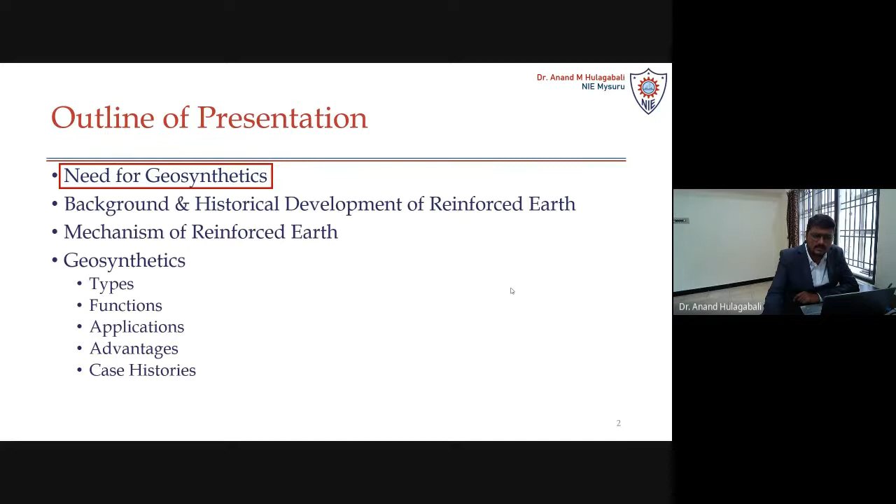So we are going to talk about applications of geosynthetics in civil engineering projects. Since this has been my primary area of interest, we have done a lot of work in this area, and a few things I'll be discussing in this particular webinar. Before I go with the actual applications of geosynthetics, first we need to understand why geosynthetics are needed, why it is so important, and the concept behind geosynthetics, which is basically a reinforced earth concept. So we'll look into some historical development and the background of reinforced earth, and some mechanism of reinforced earth. Coming to the geosynthetics, types, functions, applications, advantages, and case histories. At the end of this lecture, I'll be discussing a few case histories where geosynthetics has been deployed successfully in various sectors of civil engineering.

First thing is why we need geosynthetics. So there are different problems we are facing in today's life. All of you know that due to the heavy rainfall in recent days, in fact every year, it has become a huge problem. So landslides have become a big challenge for us. We can call them slope failures or landslides. These are due to the heavy rainfall, or small shocks from earthquakes, or some increase in pore water pressure by the rainfall. But when we are dealing with this type of slope failures, we need to understand the basic background of these slope failures, and we need to deploy some method where these landslides can be mitigated successfully.

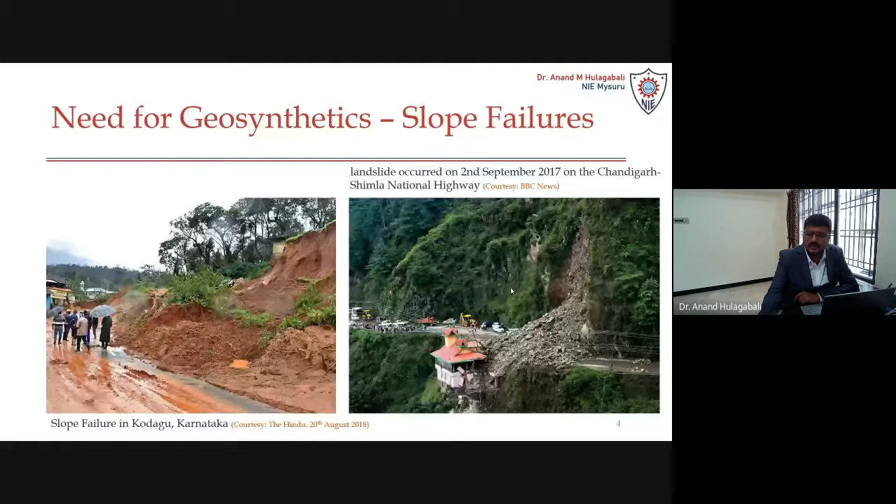So these are some landslides which occurred very recently. A couple of days back near Belgaum, Karnataka, in Dudhsagar, there was a landslide. Because of that, they stopped the railway functioning for a few days. In fact, last year we have seen many landslides near the Western Ghats, even in some parts of Coorg district in Karnataka last year and a couple of years back. So from the last 2 to 3 years, there has been a lot of rainfall, and due to that, we are experiencing a lot of problems with respect to landslides. In fact, just 3 days back, there was a landslide on the Bangalore-Mangalore highway, and some section of the highway was closed due to the landslide.

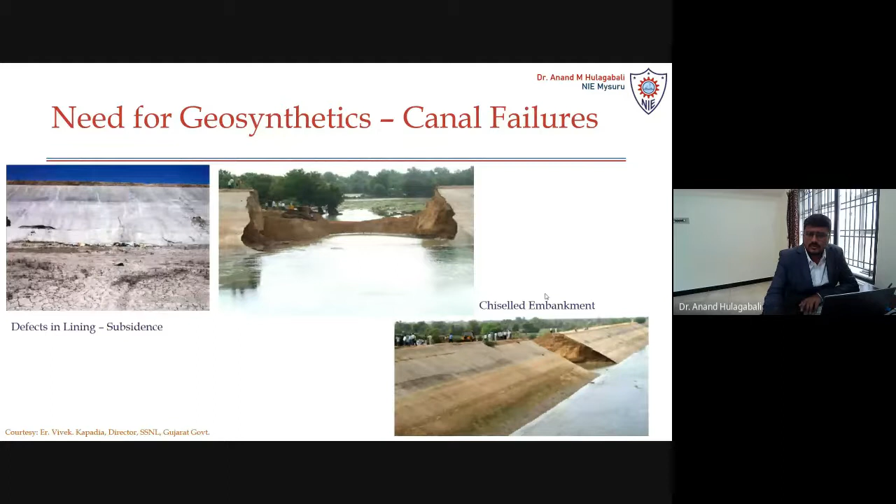And maybe due to the internal stresses which occur, that may cause the complete collapse of canal liners along with the whole section of the canals. Then, in fact, we have also seen some earthen dam failures in recent years. One earthen dam failure, which was very significant, was in the Konkan region of Maharashtra, where almost 19 deaths occurred, and also 4 people were missing, as per the newspaper records.

It was a very old earthen dam, and due to the heavy rainfall... as we all know, in the Western Ghats rainfall is a big factor, especially in monsoon seasons. So due to the heavy rainfall, there was a collapse of the earthen dam. Even in the US, there was one failure of an earthen dam, which was mentioned in the article of Sharma RP et al. in 2013.

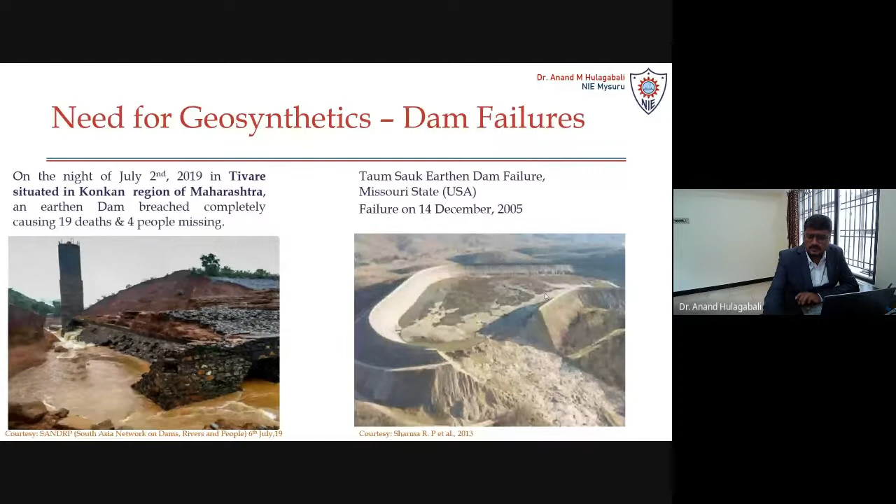These are probably due to the subgrade soil, which is expansive in nature, and maybe due to the infiltration of water from the surroundings of the pavement, which can cause such failures. So we need to deal with subgrade soil very effectively to avoid these types of failures. Coming to geo-environmental engineering, landfills are a big problem for us, with the open dumps that most cities follow.

When we have open dumps, there is a problem of rodents, and also a problem of leachate coming from the landfill, and that leachate contaminates the groundwater, and if we pump the groundwater, it becomes a huge problem for different diseases. So we need to deal with the disposal of municipal solid waste very effectively.

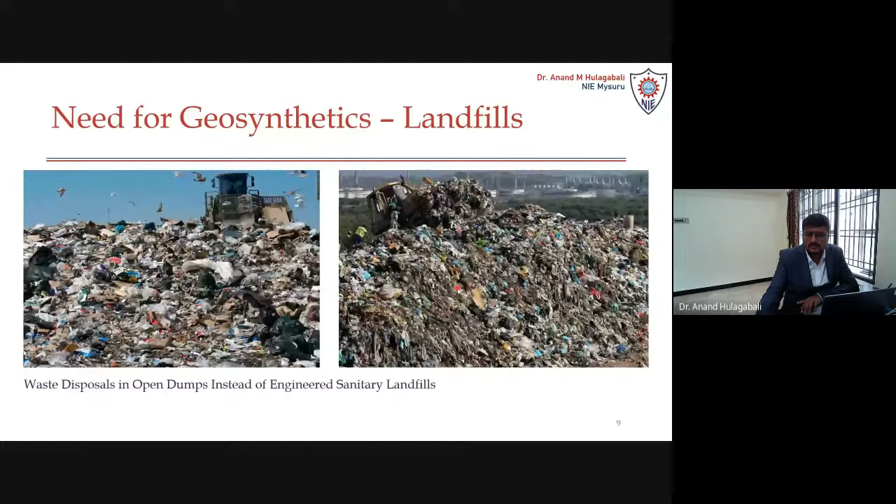Even in Mysuru, we have the problem of open dumps, even though it's one of the cleanest cities in India with a population under 10 lakhs. But we are not following engineered landfills, we are just following open dumps, and it has to be solved as soon as possible.

Coming to the failures of retaining walls, again, we have seen a lot of failures of conventional retaining walls, where the failure may be due to overturning or lateral sliding. But when we see the different failures, we understand that innovative ideas are required, and something has to be done so that we can have better stability in these kinds of structures.

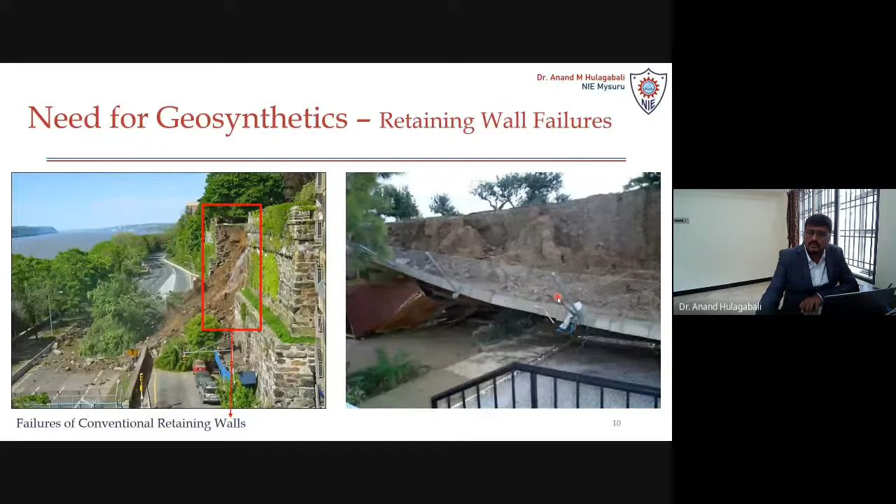So there we are going to incorporate different geosynthetic products, by which we can increase the stability of these retaining walls. Coming to shore failures, we have seen a lot of cases due to the continuous erosion of soil, or erosion of sandy soil near the seashore.

In fact, during my masters, we were fortunate to visit one of the places here near Surat, Tithal, where the gabion walls have been

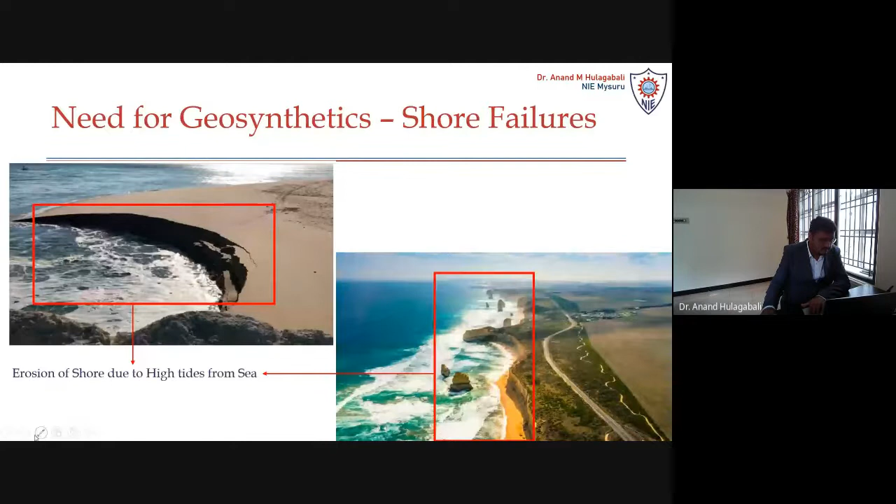Okay, then coming to the background and historical development of reinforced earth, because when we look at all these failures, we need some sustainable solution that we can easily use and implement very effectively. That's very important. So geosynthetics are based on this particular concept. We need to understand what reinforced earth is, because that concept is used for the geosynthetic products.

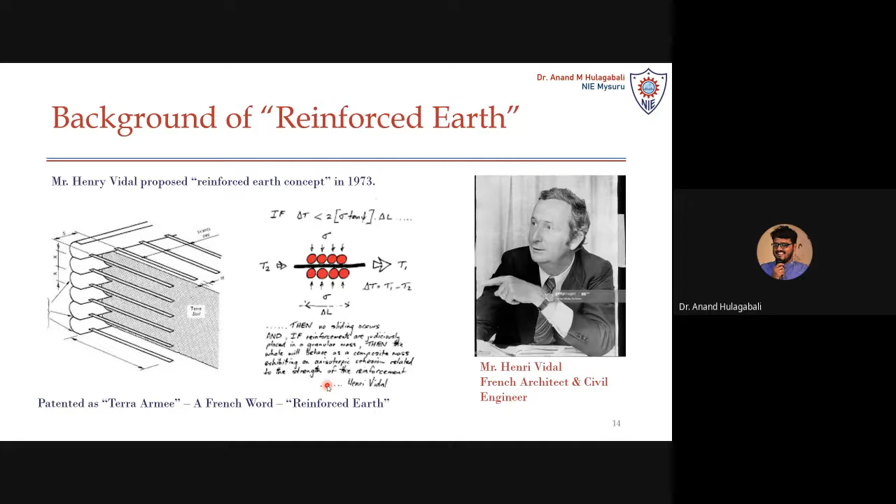It's not a new technique. Many people, especially our ancestors in rural areas, have used this technique very effectively, but it was technically patented by Mr. Henry Vidal, a French architect and civil engineer, who proposed the reinforced earth concept in 1973. The concept is very simple: when we use reinforcements in the soil, we can reduce the deformations. That is all about this concept.

You can look at this. We have a reinforced soil, and even if you apply the weight of a very huge car, we can see very little deformation. And there's a beautiful story behind this. You can look at the animation I have tried to show here.

He was very surprised, because when they were jumping on the pyramid with these tree branches, he could see that the sand was not deforming too much. So he compared before the tree branches and after the tree branches, and he was surprised because the deformations varied so much.

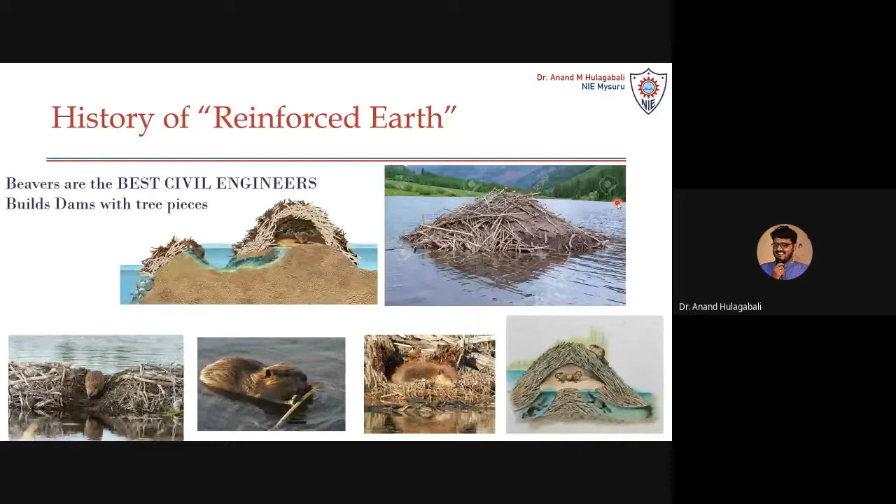And some history. When you go back 3,000 years, the Ziggurats of ancient Mesopotamia were almost 80 meters tall. The Ziggurat was built with clay bricks reinforced with reed grass. Reed is the name of a plant. Clay reinforced with reed was used for the construction of clay bricks, and these were used in different layers with spacing of 0.5 meter to 2 meters.

Of course, now there has been a lot of settlement of this Ziggurat. Now it is somewhere near 38 to 40 meters, where initially it was around 80 meters tall. But what we need to appreciate is that almost 3,000 years back, they actually thought of using the reinforced earth technique.

In fact, even in the Great Wall of China we have the concept of reinforced earth, especially on the western side. They built it on the eastern side and the western side. On the eastern side, they used bricks and chiseled stones, whereas on the western side, clay and rammed earth with some tree branches were used. This combination of reinforced soil was successfully used in the construction of the Great Wall of China on the western side.

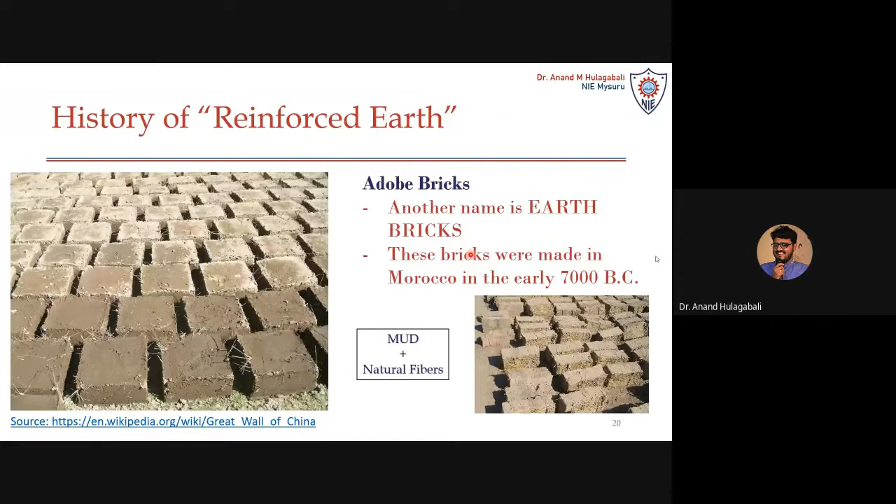Okay, and now let us look at the mechanism of reinforced earth. What exactly is going to happen in the reinforced earth concept? We have seen some history; this has been used very effectively for so many years. But when you look at the mechanism, what exactly happens between the reinforcement and the soil, how we are getting better stability, and how the deformations are being reduced, that we need to see.

In fact, you can simulate this using an experimental setup, especially the triaxial test setup, or maybe the UCS setup, where we can compare both the reinforced and unreinforced case.

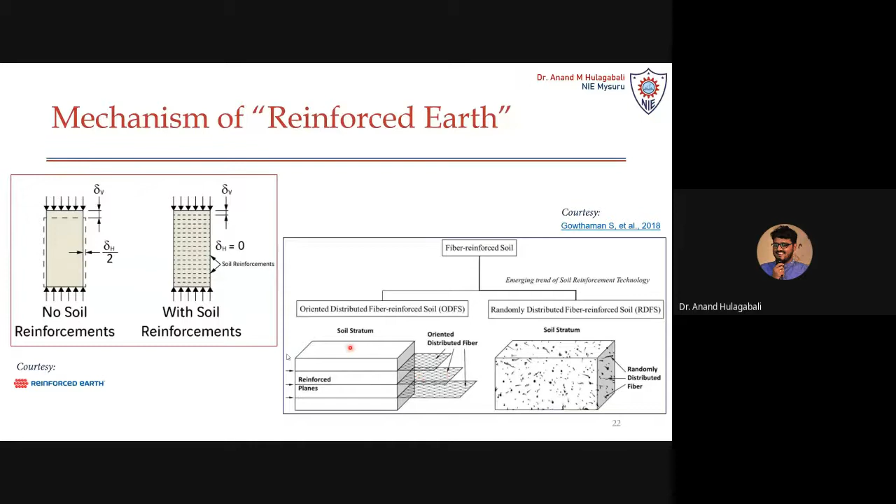So we have planar reinforcements like geogrids, geotextiles, even geocells, which are basically planar in nature. So what is the interaction here? When we have the soil particles, from these soil particles the normal pressure is going to be applied on the reinforcement, and there is going to be a frictional force between the soil particles and the reinforcement.

And when you apply the pull-out force, there is going to be a passive force, and due to that passive force you are going to have better resistance. That is the main idea behind this reinforced earth concept. In fact, in the FHWA manual volume 1, FHWA NHI 10024, they have given this interaction in detail, so one can refer to that manual for more details.

Now coming to the most important part of our lecture, the types of geosynthetics. We have seen the need, why geosynthetics are required, the historical background, and the mechanism. First, we'll look at the types of geosynthetic products. There are two: natural and man-made. In natural, we have coir and jute textiles. In man-made, geotextile, geogrid, geonet, geocell, geomembrane, geodrain, geofoam. And special products like geosynthetic clay liner, geosynthetic erosion control mat, and prefabricated vertical drains, PVDs. We'll see them one by one in more detail.

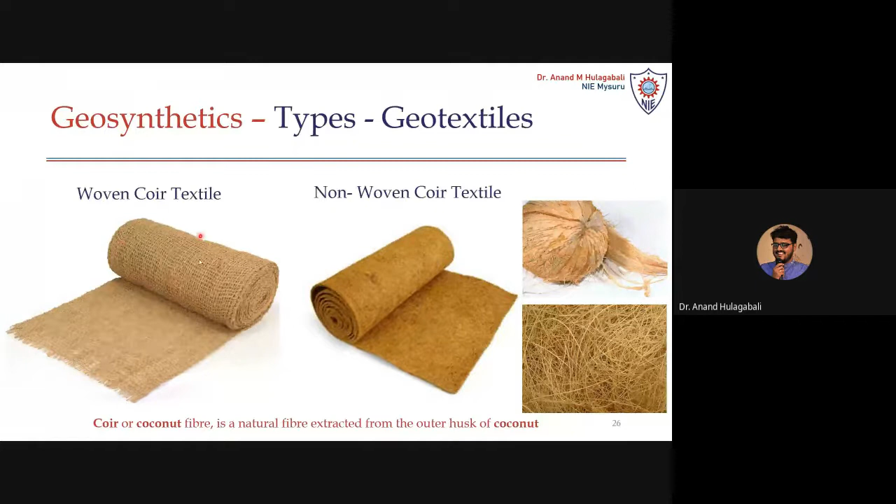These are the natural geosynthetic products, called coir, basically fibers coming from the coconut. These coconut fibers are used in manufacturing woven and non-woven coir textile. We also have woven and non-woven geotextile from jute, which is obtained from the plant Corchorus olitorius, and from this we obtain woven and non-woven textiles.

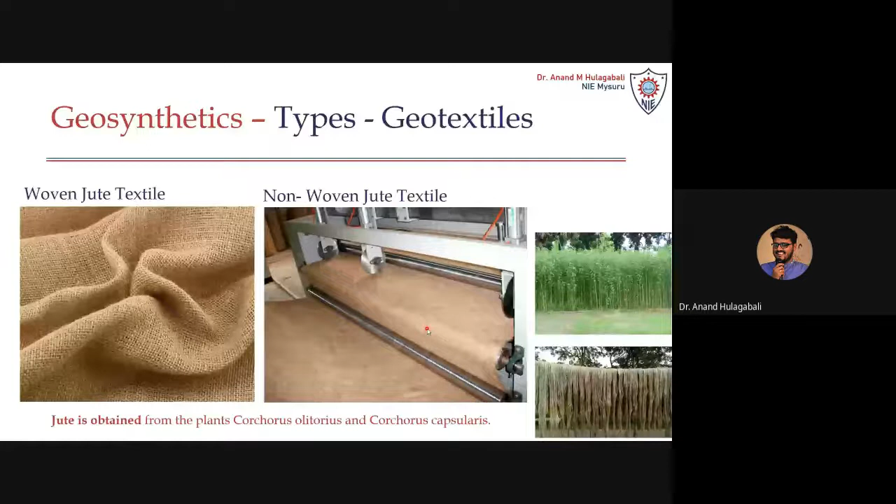Woven means we stitch them properly in a sequential manner, but non-woven jute textile is randomly stitched, or randomly punched with needles. This is what happens in man-made geotextiles, products stronger than the previous one. Coir and jute are going to decompose or degrade with the soil. But here we have woven geotextile which is being used for different functions.

And this is a non-woven geotextile. Non-woven geotextiles basically come in thin and thick varieties. The thick non-woven geotextile is used for drainage and cushion. The thin non-woven geotextile is used for separation and filtration.

And this is how they are being oriented. They are very randomly oriented, so they are not in a proper way.

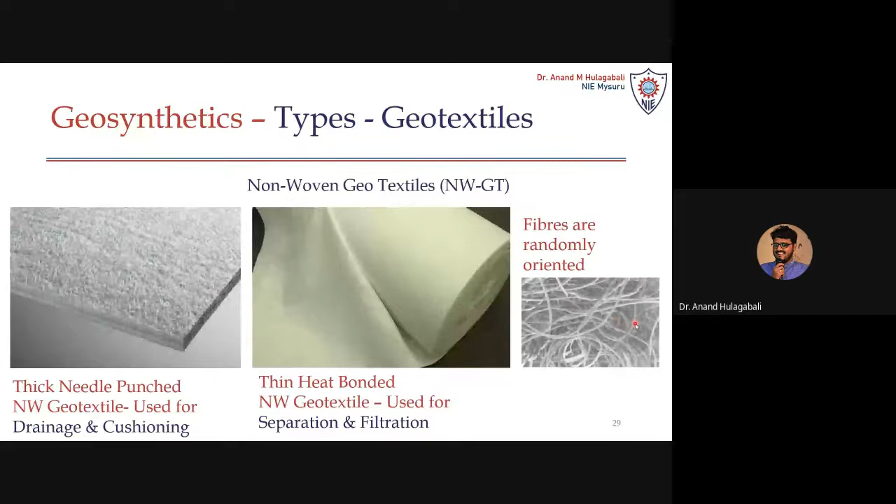Biaxial geogrids are basically used below the footing. And even recently, these triaxial geogrids have been introduced by Strata and even Maccaferri, which can be used for road upgrades.

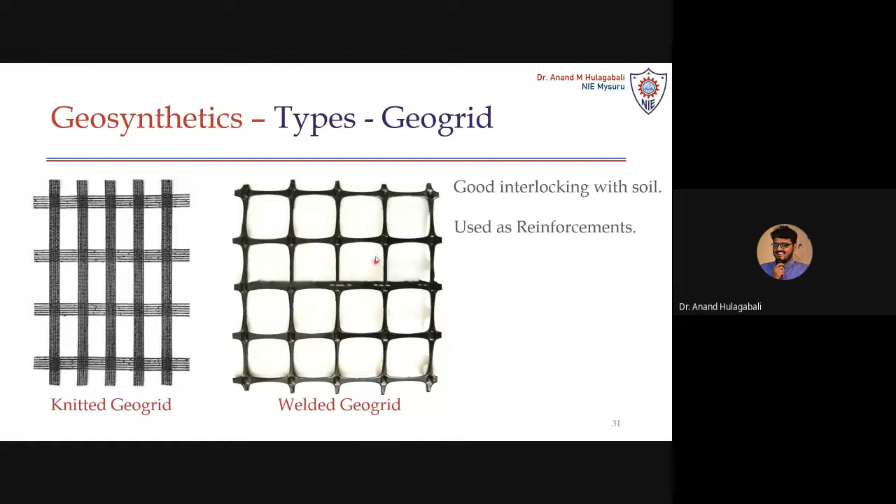Again, in geogrids we have two types: one is knitted, the other is welded. The knitted geogrid looks something like this, which is being knitted, and welded is where at the joints we weld the nodes. So we have the geonets.

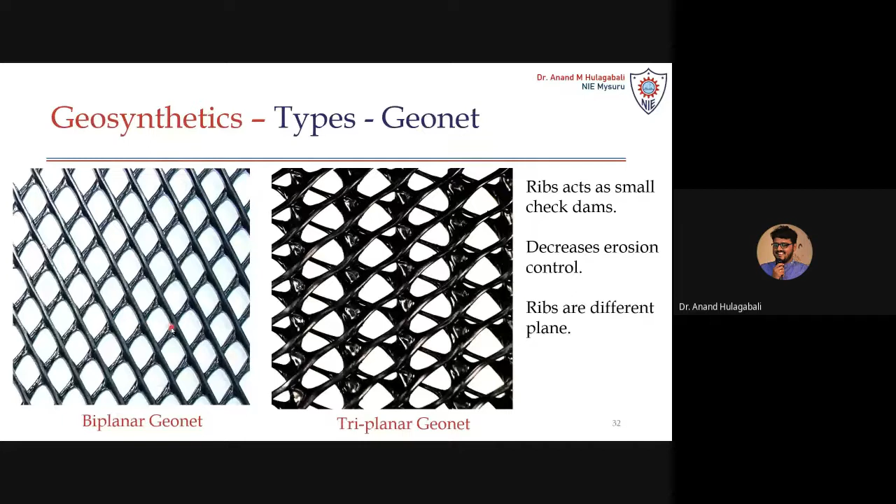So geonets basically look like this. They are used especially for drainage. Here we have two ribs which are at completely different planes, and these ribs act like check dams. That's why these are the best suitable products, especially for drainage applications.

Then we have geocells. Geocells are very easy to transport, and we can fill any material in them - we can fill with some gravel, we can also fill with stone aggregates. And these pockets, when filled, become much stiffer, which is best suitable for road upgrades. Even in container yards, also we can use them.

We can also use them for slope stability. When you use them in steps, in slope stability also they are much effective. So geocells are basically used for spreading the loads to a larger area, especially for the subgrade - they are much suitable.

And we have something called geomembrane. Geomembrane is used to contain liquid or solid - especially in case of canals, to contain the liquid, and in case of landfills, to contain the solid waste, we use these geomembranes. In fact, these geomembranes come with different thicknesses and different types of materials.

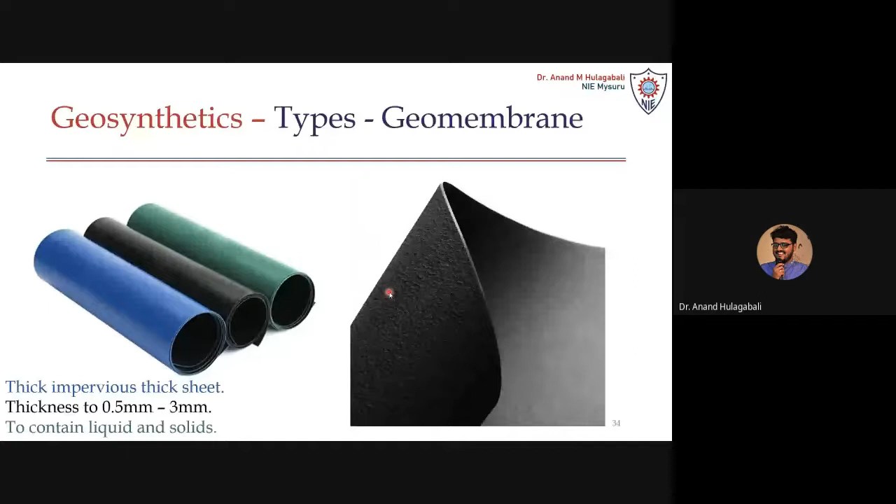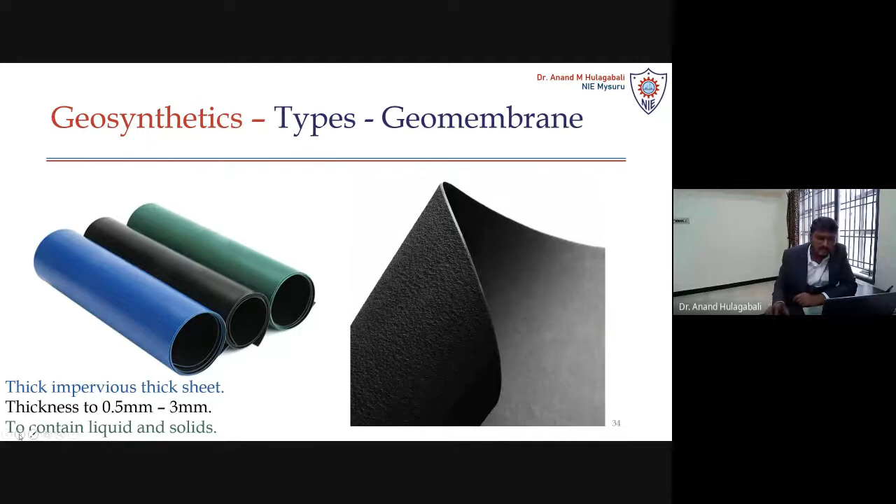For example, the geomembranes can be made of low density polyethylene, or we can have geomembranes of high density polyethylene. It again depends upon the need of the client, the need of the function, the need of the project. Based on that, we select the thickness and the type of geomembrane. But these are highly impermeable materials, and they actually contain some liquids and solids.

So these are geodrains. Geodrains are used behind retaining walls. In the earlier days, we used to have chimney drains, basically made up of stone aggregates, where we have a lot of space for the seepage of water. But in recent days, we have this geosynthetic product where we use geodrains for better drainage of water behind the retaining walls.

Again, in the case of retaining walls, instead of backfill soil, we can use geofoams. Geofoams are basically a very lightweight material, and they make the structure very flexible. In fact, you can use them as a backfill in the retaining wall.

The main idea is when we determine earth pressure from the backfill, the earth pressure is going to be much less for this, because when you take the unit weight of the geofoams, that is much lesser compared with the soil. Because of that, whatever earth pressure you get is going to be much less. So that is why the geofoam becomes much advantageous.

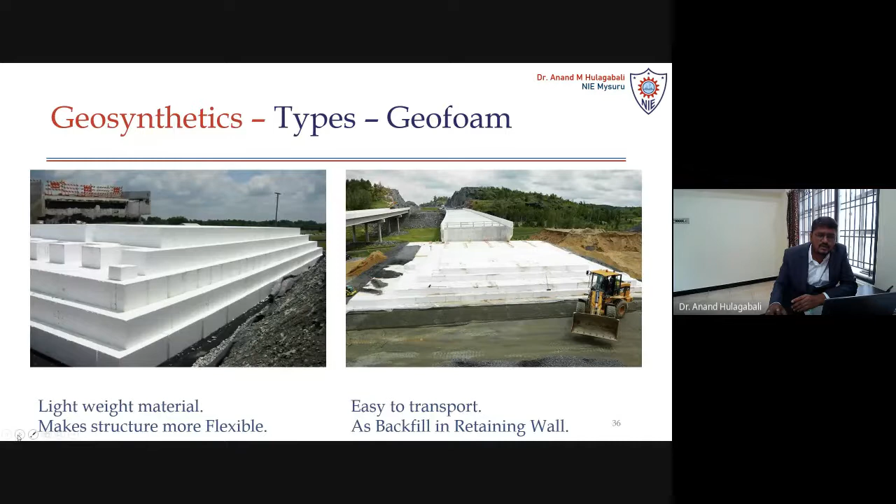Geosynthetic clay liner is used in landfills. It is an interesting formation with two non-woven geotextiles, and in between we have bentonite. This bentonite, if it comes in contact with water, tries to swell. So it's like a self-repairing mechanism, and that's one of the major advantages. This is used below the geomembrane in the landfill.

Suppose there is some leakage in the leachate. When the leachate comes in contact with this bentonite, it expands, and if there is a puncture in the geomembrane, that puncture will be repaired by the GCL. I'll come to the application part where we can see this in more detail.

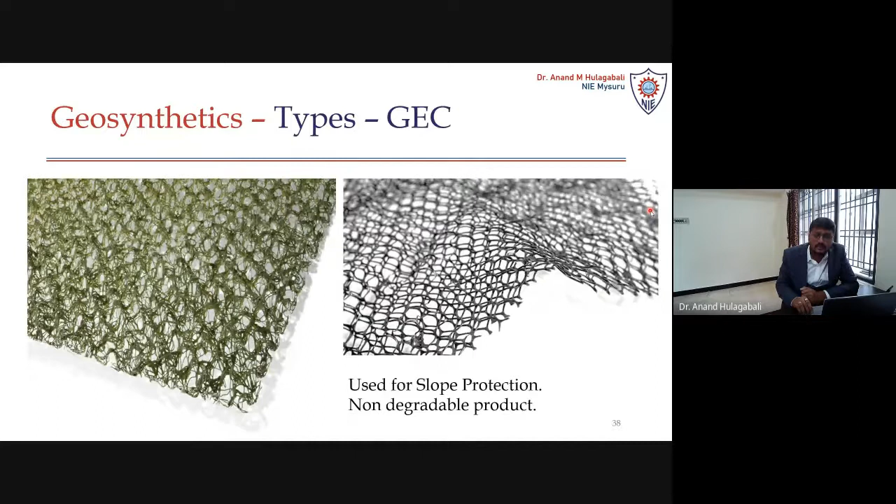Coming to GEC, these are erosion control mats, geosynthetic erosion control mats, which we use in slope protection works. In the initial slides we saw that slope failure has become a major issue, and we can have such options with mats for better seepage of water so that there won't be further failure of the slope.

Then we have something called PVDs. You all know about the preloading technique, especially the pre-consolidation technique in clay soil. To increase the consolidation of clay, we used to have sand drains along with the embankment we are going to construct, so that we increase the consolidation process of the clay.

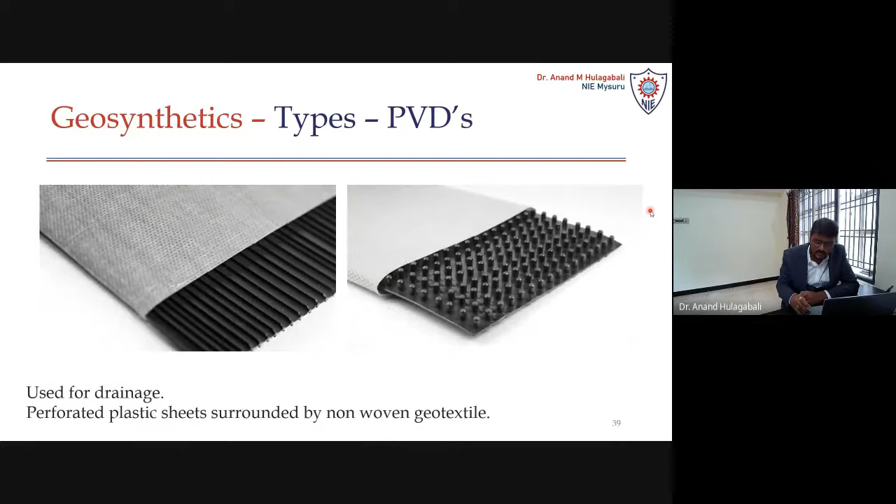But we can use these products instead of sand drains, where PVDs are replaced in place of sand drains. These PVDs have a corrugated plastic sheet at the center, and this sheet is covered by non-woven geotextile. Here you get much better drainage, almost the permeability equivalent to sand drains, so the consolidation process and consolidation settlements are much faster.

Then we have very interesting products called geocomposites. A geocomposite is all about combination. For example, if I want separation and also drainage, I use non-woven geotextile (NWGT) combined with geonet. Geonet is for drainage, and non-woven geotextile is for separation or filtration.

We get special adhesives in the market, so we can fix two products together and use them in combination, taking advantage of the functions of both products and using them very effectively. Non-woven geotextile and geonet, for example, if you want separation and drainage, this is the option you have.

Non-woven geotextile plus geogrid: geogrid is used for reinforcement, and non-woven geotextile is again for separation or filtration. Woven geotextile and geodrain: again, one is for drainage, the other is for reinforcement. Now coming to the functions.

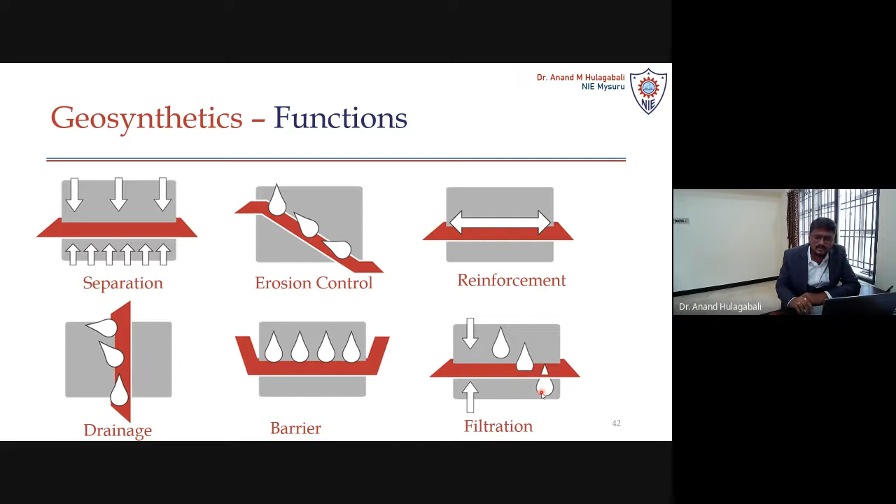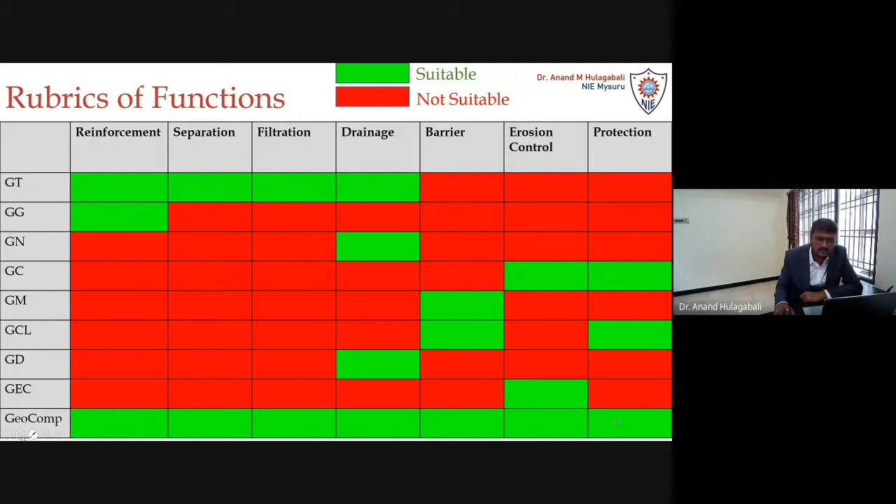Geocomposites are up to the imagination of the engineer. You can combine two products and have all the functions or any of the functions. That's why I have mapped geocomposites with all the functions. So this is how the rubric looks like with respect to the functions.

Now coming to the very important part of our lecture, applications of geosynthetics in civil engineering projects, which is the title of this lecture. Here I'm going to talk about different applications, the different areas which come under the umbrella of civil engineering. We can see disaster management, especially landslides, water resource engineering, especially canals and earthen dams, transportation engineering in case of pavements and runways, geoenvironmental engineering in case of landfills, and shore protection in offshore engineering.

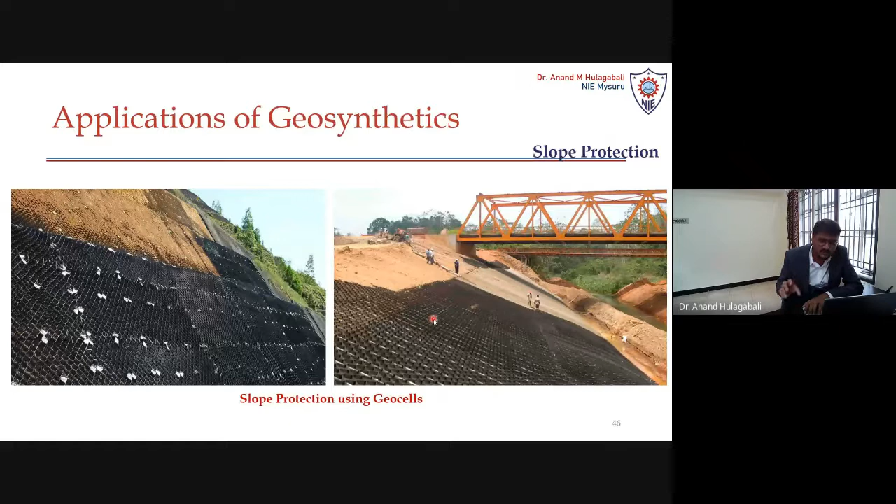In slope protection, we can use geocells, like this. You can look at this, they have used the geocells, and it can be used with some filler material so that we get much better properties.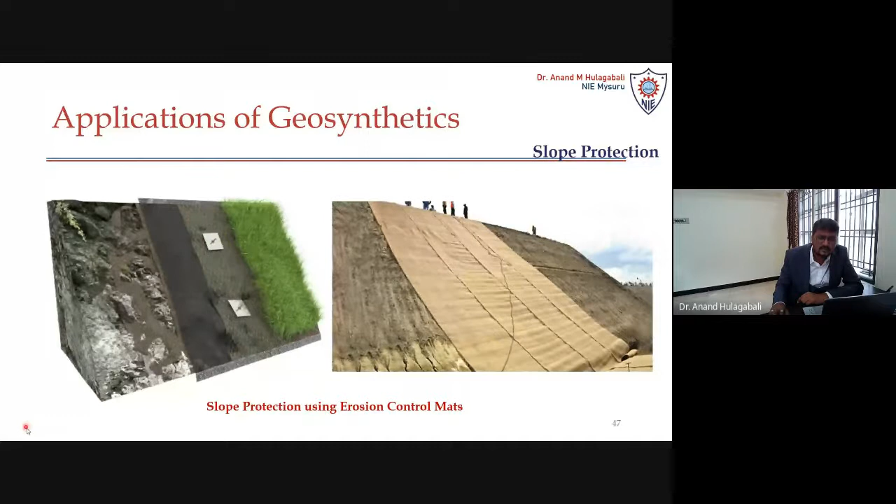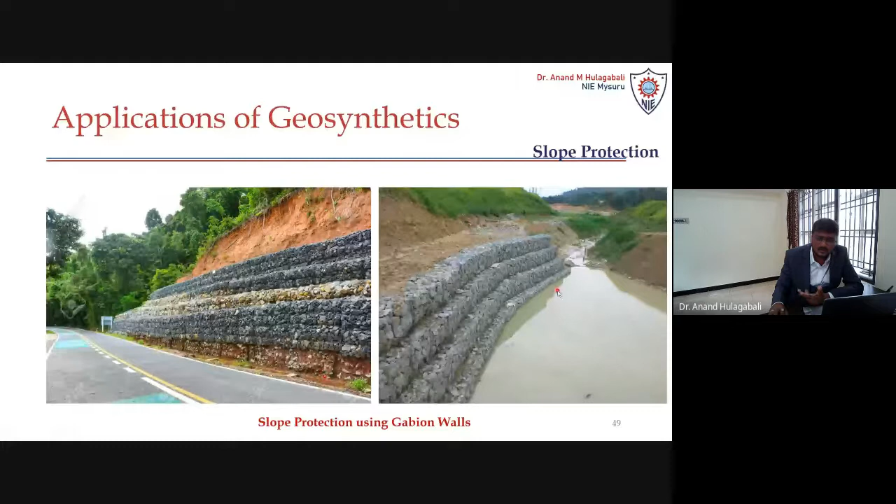Gabion walls can be used near roads or near water bodies, which is very useful. In canals, on the bottom layer and side liner, we can have geomembranes. Having the geomembrane is very advantageous because it is a barrier, so it can contain liquid. When we have geomembranes, the efficiency of canals is very high, because there is no infiltration of water into the bottom liner or side liner. That's very advantageous, and that's why we use geomembranes in canals.

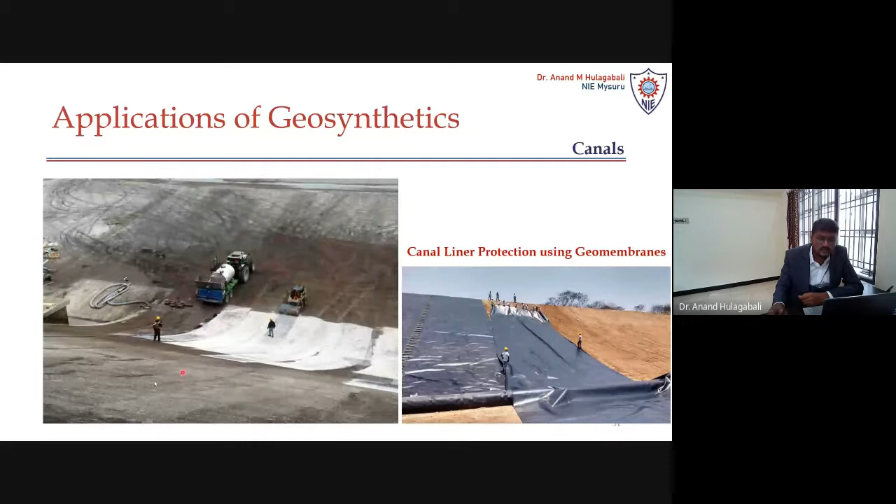We can just look at this, where they are laying the geomembrane sheets on the side liners, and even on the bottom liner they are trying to lay some of the sheets.

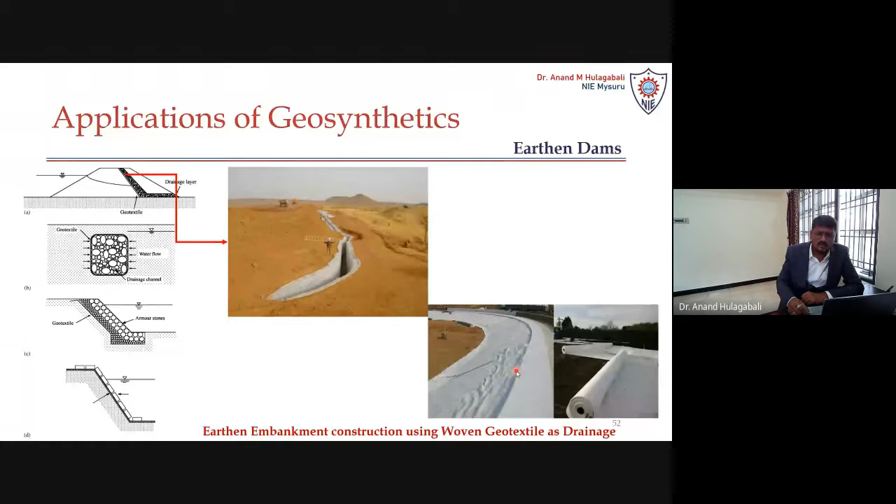In earthen dams, we also have a lot of usage of geotextiles. You can look at this, these are the sections where we use geosynthetic products - on the upstream side this may be a geomembrane, on this side this can be a geomembrane under drain, and this can be a chimney drain with some stone aggregates, and this can be a finger drain outlet.

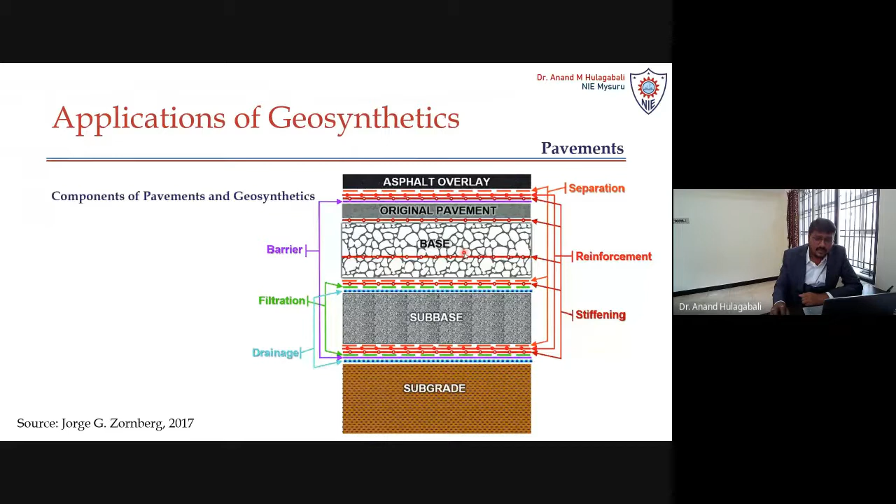But when you look at the applications of geosynthetics in all these layers, between subgrade and subbase, we have geonet, we have geotextile, we have geogrid. Again, in between subbase and base, we have so many products there. Especially when we are talking about durability and sustainability, these are the things we need to look for. We can minimize the surface settlements of the pavement, have much better performance, and also a much better life cycle of a pavement. That's very, very important.

In fact, even in the pavement, we can use geosynthetic products, especially the geotextile, in between the surface layers itself, which is called asphalt overlay fabrics. For example, let us say this is an old pavement, and here you are going to have the new pavement layer. Already you have the old pavement layer, and above that you are going to lay down the new pavement.

So in that case, what happens? Let's say there is a crack here in the older pavement. When you just lay down the new pavement, that crack is going to propagate into the upper layer, something like this. The crack from the older pavement is going to transfer into the new pavement, which should be avoided, right? So what we do here is we can have one geosynthetic product, especially the woven geotextile, which is the best product for this.

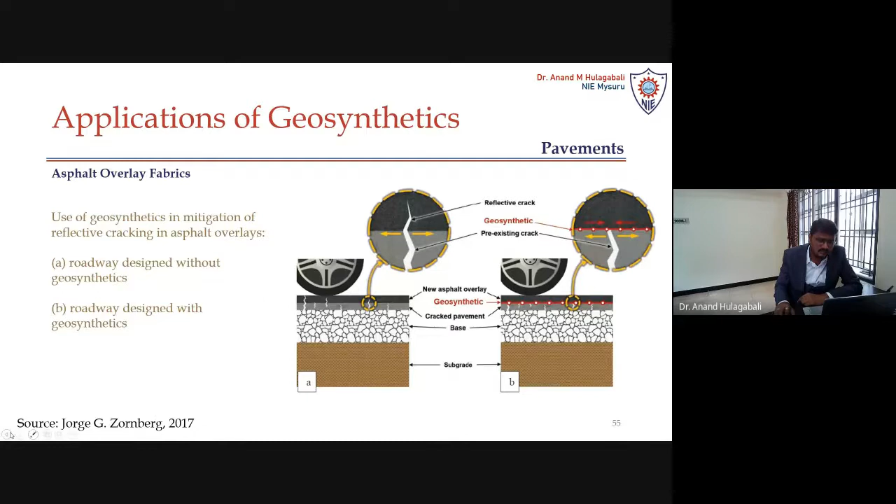The woven geotextile can be placed here, and you can compare this image and this image, where the crack propagation has been stopped. Now the crack has not propagated into the new layer. This has been taken from a very interesting paper from Zornberg 2017, so you can also refer to that paper for more details.

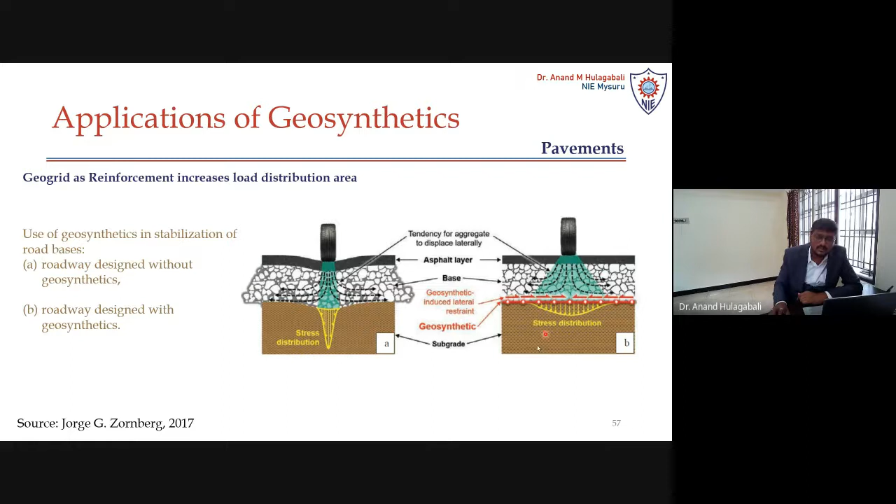Another example, where you can look at this in the case of bearing capacity analysis. As you know, this is the example of punching shear failure under concentrated loads. Once I use the geosynthetic product at the junction between the base and subgrade, what we are really doing is trying to convert that punching shear failure to general shear failure. Now you can look at this. This is a punching shear failure example. And here, this punching shear failure has been converted to general shear failure.

So general shear failure is all about well-defined shear failure surfaces, and these shear failure surfaces are reaching the ground, and here you are distributing the stress to the larger area so that you are going to minimize the settlements to a larger extent. So that's very, very important.

In fact, in the pavement again, you can use the products for drainage. Let's say there is a water logging problem below the sub base, below the base. In that case, what you can do is have one geosynthetic product like geodrains or geonets, where you can drain out that water completely, and you can have better performance of the pavement layers.

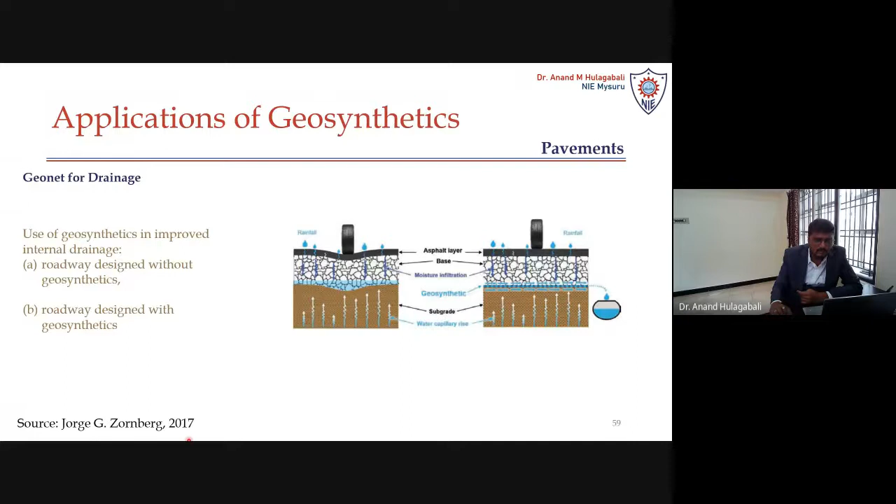So you can look at this. You can just compare this image and this image. Here we have a geosynthetic product. All the water has been drained and collected at the drains which we have at the sides. From those drains we can drain out the water. So drainage is again one very, very important thing.

So geogrids can be used for reinforcement. We can have the geogrids below the surface layer, which can be used for the betterment of the reinforcement, to increase the strength of the pavement layers, to increase the performance of the pavement layers. In fact, you can see that these are the triaxial geogrids which have been used here, which are recently produced by very good companies in India.

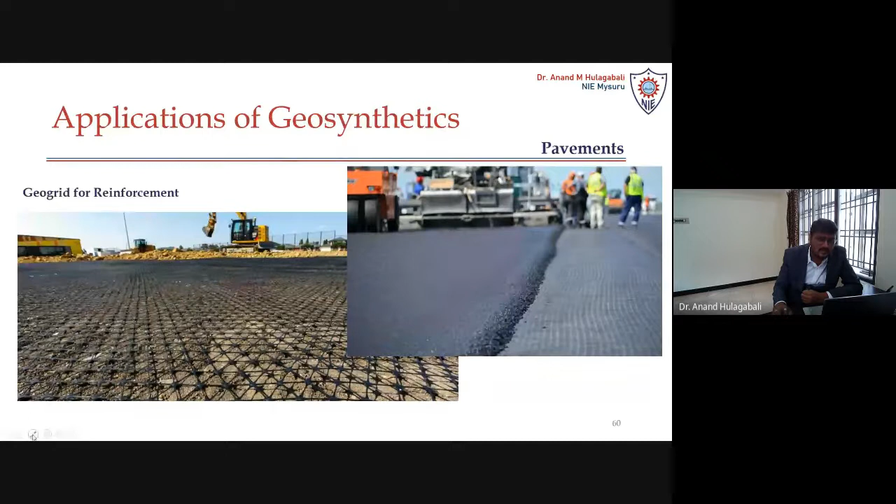And again in the pavements, as I said, geotextiles and geogrids are being used for reinforcement, separation, filtration, and drainage. Now you look at this. This is a geogrid which is used for the reinforcement purpose. This is a geotextile which is being used for the separation or filtration function.

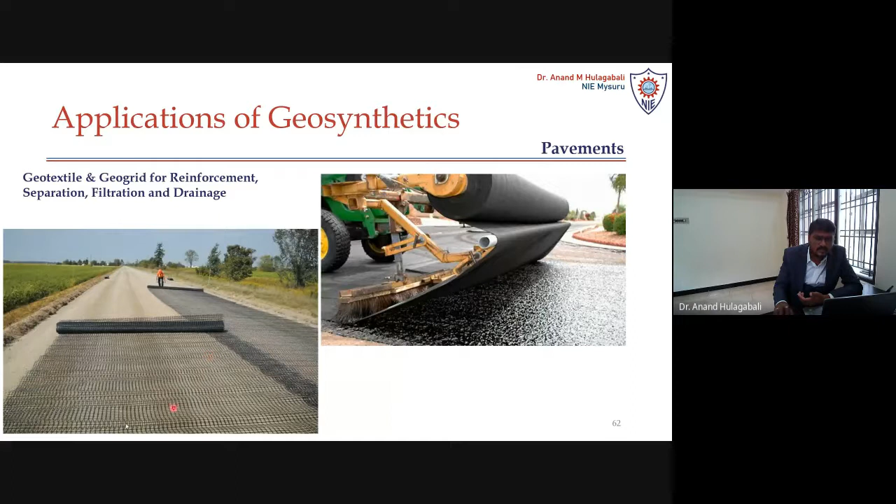Some examples you can look at. This is on the older pavement, being used as overlay fabrics, geotextile overlay fabrics, so that you cannot propagate the older crack into the new pavement. So that is the example here, and we have the geogrids here being used as reinforcement.

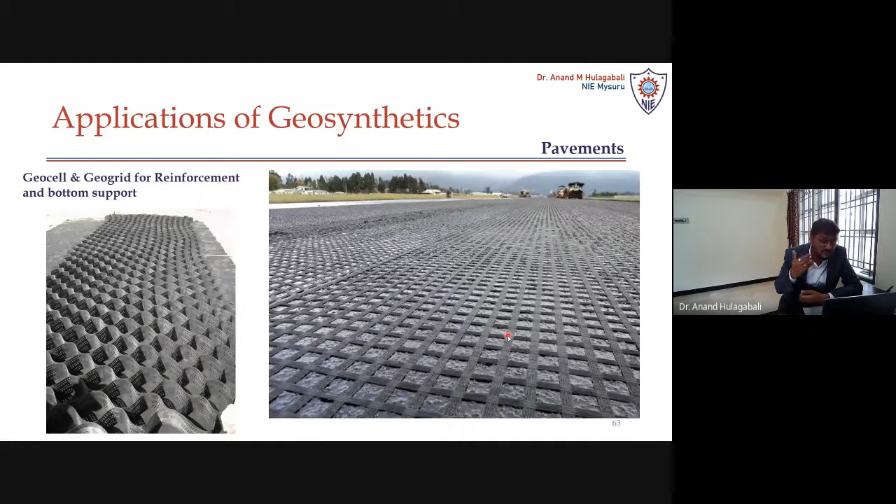In fact, in some of the examples, especially in subgrades, we have used a lot of geocells also. To have better uniformity in the subgrade, geocells are being used, and these are the knitted geogrids used for the reinforcement purpose, especially at the junction of base and subgrade.

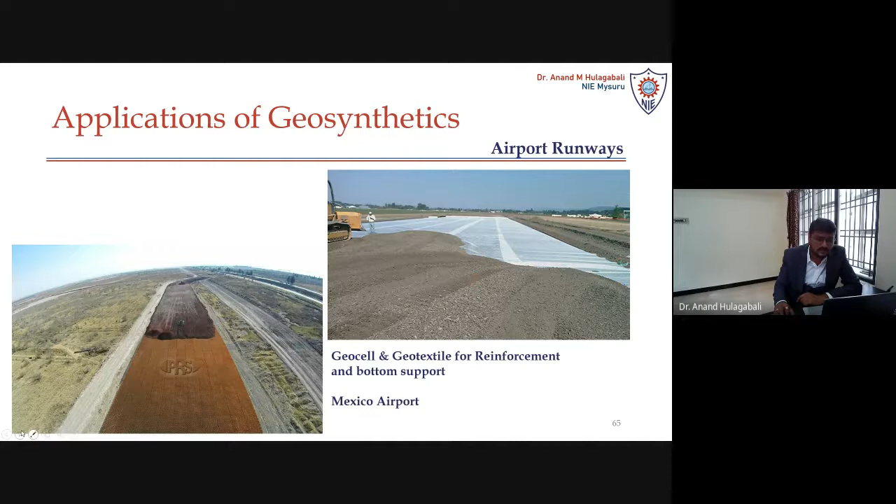So we need to dispose it properly. And this is leachate, what you are looking at here. So this leachate, if it is contaminating the water, then it's a big problem. So this is also one of the studies done by a very good friend of mine, Vemula Anand Reddy. Recently he defended his thesis.

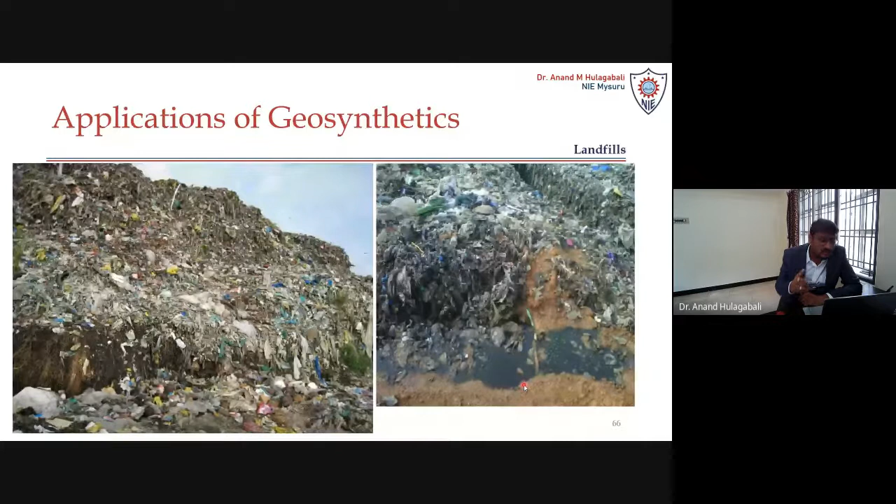You know, these contaminants, when they are mixed with the groundwater, then of course they are not meeting our drinking water standards, and in fact we need to avoid that. Okay, so we need to avoid that. To avoid that, we need to have liners for the landfills. So this is the best way of disposing the waste.

Okay, so this vegetation is much needed because of two things. One is aesthetically it is very pleasing, and also we can actually use that place for recreational purposes. For example, you can make it like public parkings, or maybe public parks, or maybe gardens or something like that. So this is a very, very important thing.

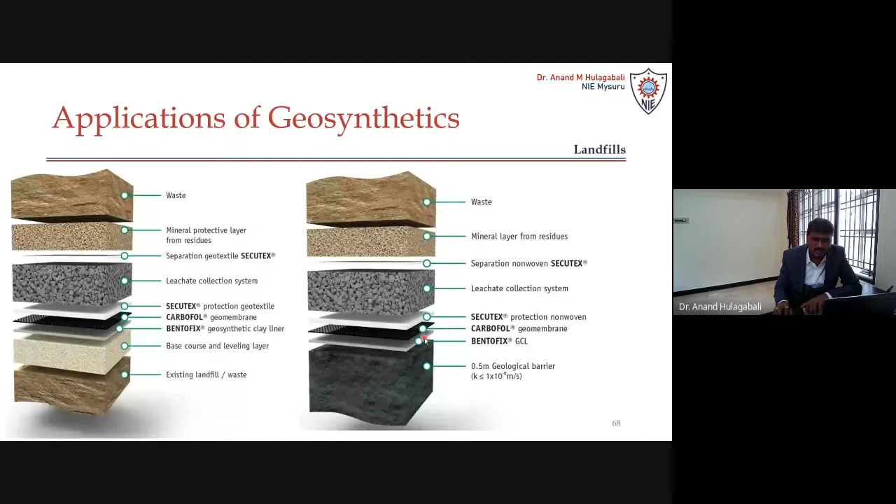Then we have non-woven geotextile. Then a protection layer from the residue. So this is basically a gravel layer. Then we have the waste at the top. Okay, so this is the best example of the liners. And this is a closure. So closure is something like this.

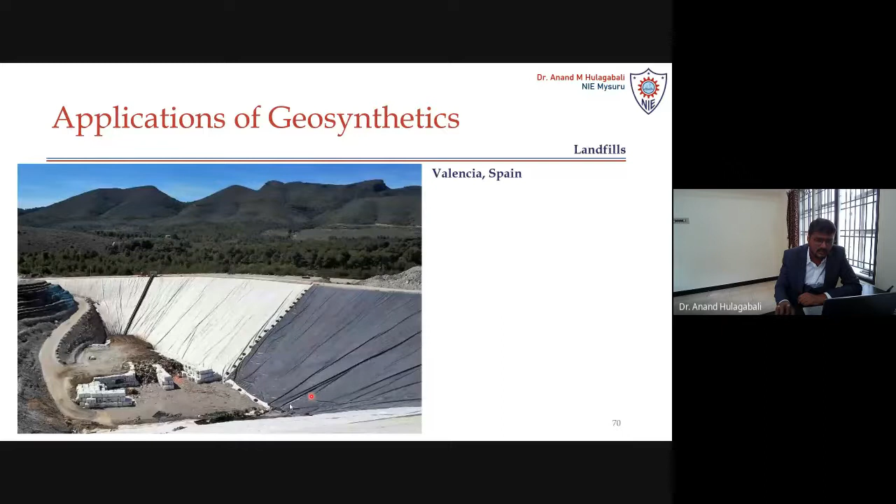A few case studies I'll try to show you here. Especially this is from Valencia, Spain. And these are the liners. Okay, so this is geotextile, this is a geomembrane. So waste is being dumped here. So these are the liners which are basically used at the bottom and at the sides. So you can see that a lot of waste can be dumped here. So on the liner and the sides, geomembrane liners are being used.

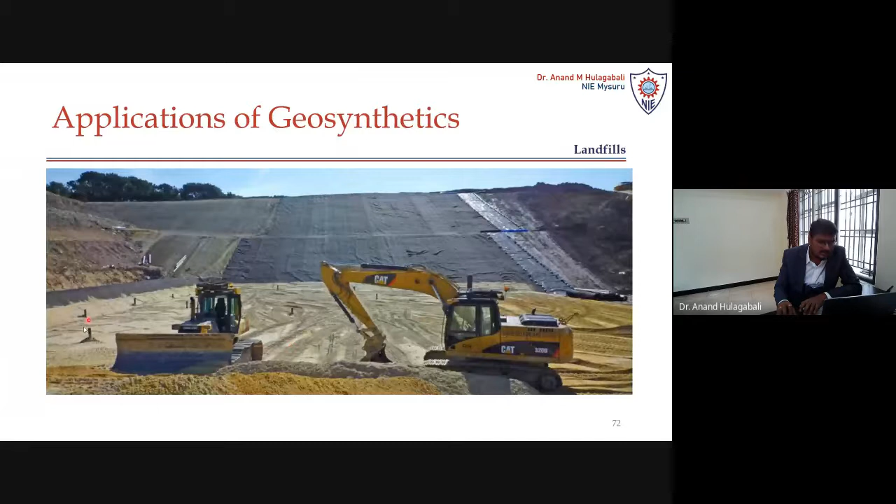First, we prepare the things. So these are the pipelines for the gas collection. So methane gas is being collected here. For a few examples, you can look at this. Okay, so this is the hazardous waste collection landfill, and these are the regular MSW waste collection landfills.

And in fact, this is one very near to Surat. We have Vapi. This is India's first vertical landfill. Okay, so they have used a reinforced earth retaining wall, which is also popularly known as MSE wall, for increasing the capacity of the landfill. Because this is a landfill we have, and this is the MSE wall. So the reinforced earth technique is used here and also here.

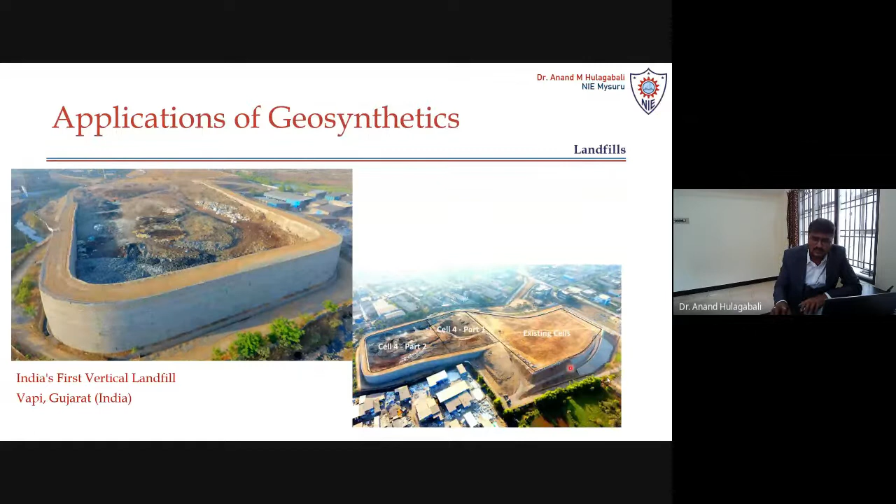So they work in different phases. So this is the existing cell, which is already being filled, and you can look at the other cells here. So the completed landfill looks something like this. Okay, so it is very pleasing and very useful for further use. Also, you can have gardens here. You can have some parks here for different purposes.

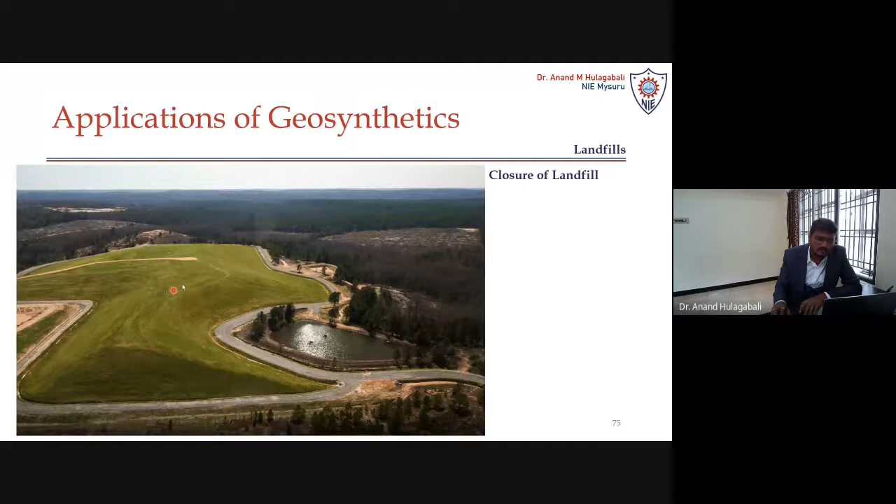Okay, so whatever you are looking at here, this is a completed landfill in all aspects. Okay, so below this, if you just do the investigation, you'll find all the waste and other things. Now coming to the very important part, that is MSE walls, or reinforced earth retaining walls. So there are different types of reinforced earth retaining walls.

I think most of us have seen these types of walls, especially in the underpasses, in the flyovers, especially from Mysuru to Bangalore. We have an expressway under construction, where you can see almost 40 to 45 reinforced earth retaining walls, which are basically used for the 10-lane expressway between Mysore and Bangalore. So this is one of the very advantageous MSE walls.

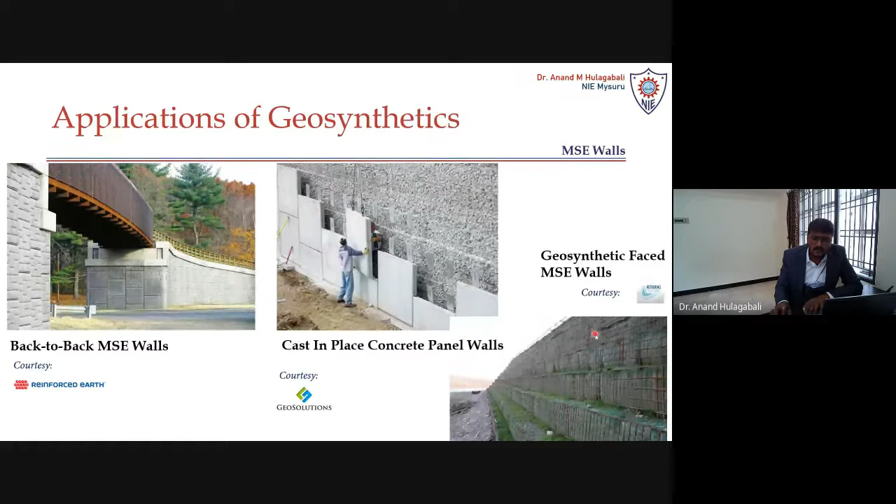In fact, in Surat itself, we have seen a lot of flyovers, and most of these flyovers are constructed with this particular technique, the reinforced earth retaining wall technique, or the MSE wall technique. Okay, fine. So these are some other types.

As I said, even our own Ahmedabad and Baroda highway, NH48, in that stretch we can see a lot of modular block retaining walls, and these are basically reinforced with geogrids at the back. At the facing, we have facing panels, and at the back, we can have geogrids or geotextiles or geosynthetic straps. So there are different things. Just now I mentioned about this.

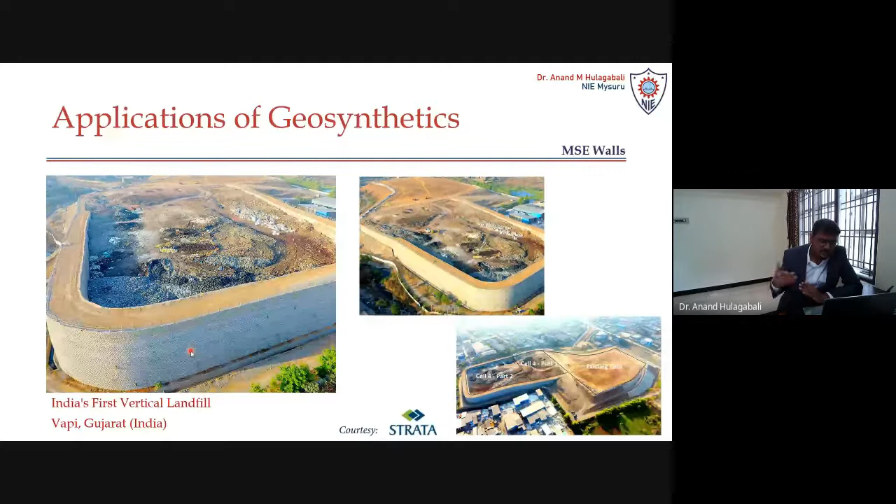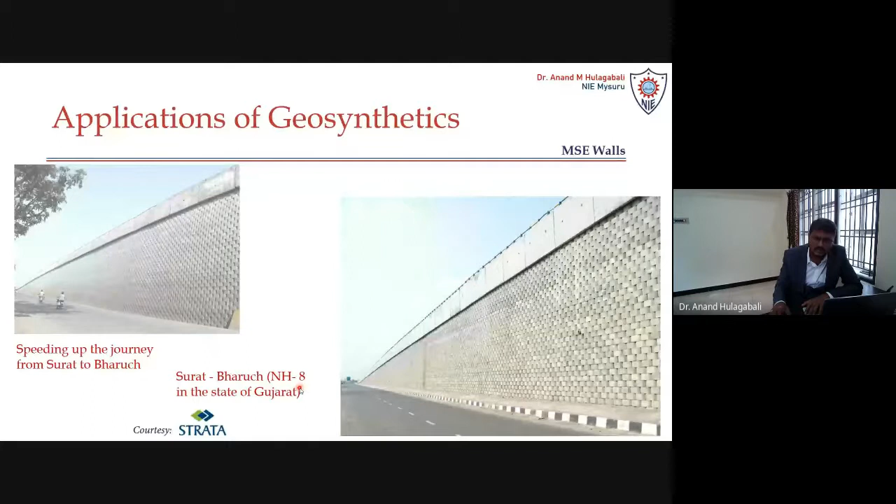So this is the MSE wall, which is basically used for the landfill. So in Vapi, both applications are there. One is the retaining wall application with geosynthetics. In fact, in the landfill, geosynthetic applications are there. In fact, on the Surat Bharuch highway also, we have modular block retaining walls, earth retaining walls, which are basically constructed by Strata.

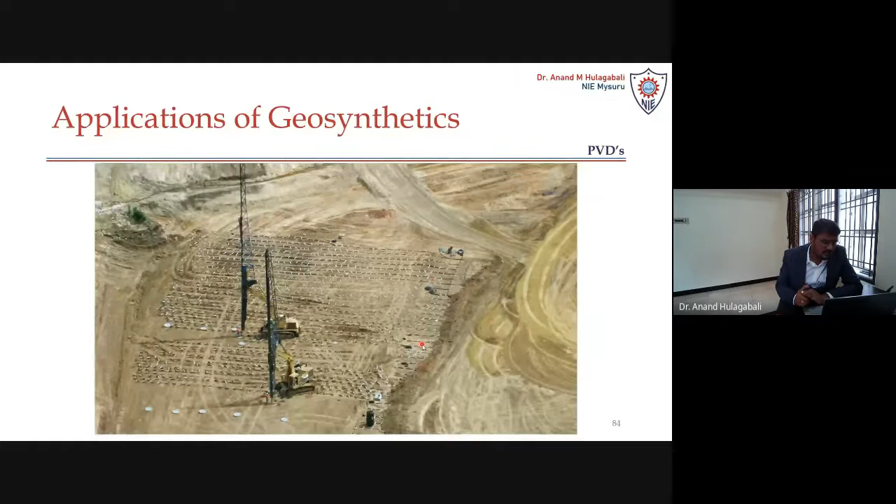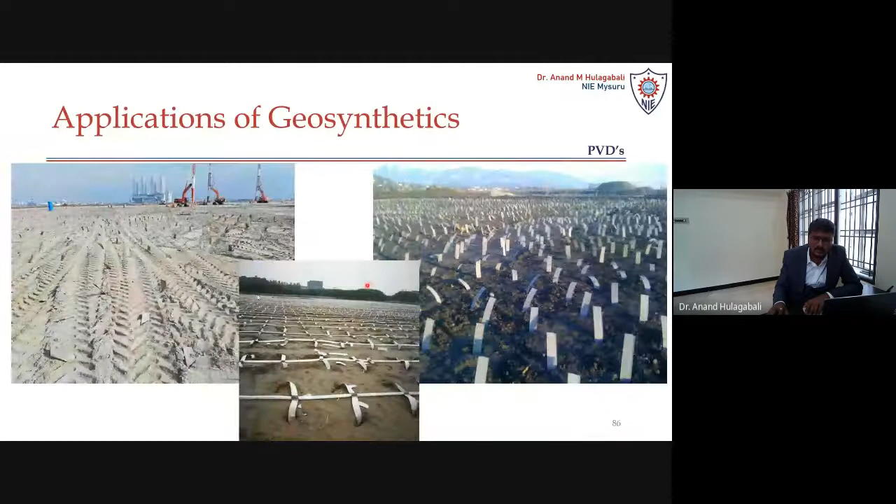And especially for shore protection. Whatever problems I mentioned in the initial slides, here we have the solutions. The problem of soil erosion on the shore can be addressed by sandbags, which are basically geotextile sandbags. And in fact, we can also use gabion walls.

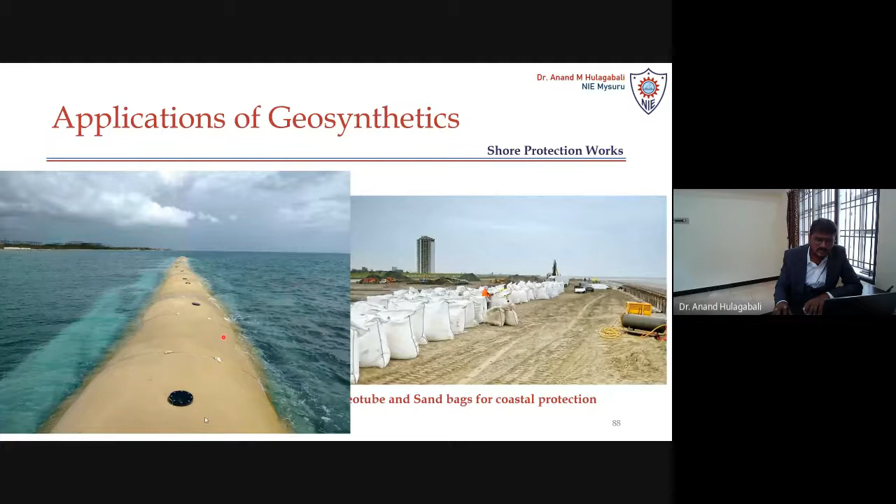So this is one example of geotubes, which are basically made up of geotextile with some pressure inside. So this is a geotube, and these are the sandbags used for coastal protection. These are the best examples you can see here. So these are a few applications we have seen. Now let us look at the advantages.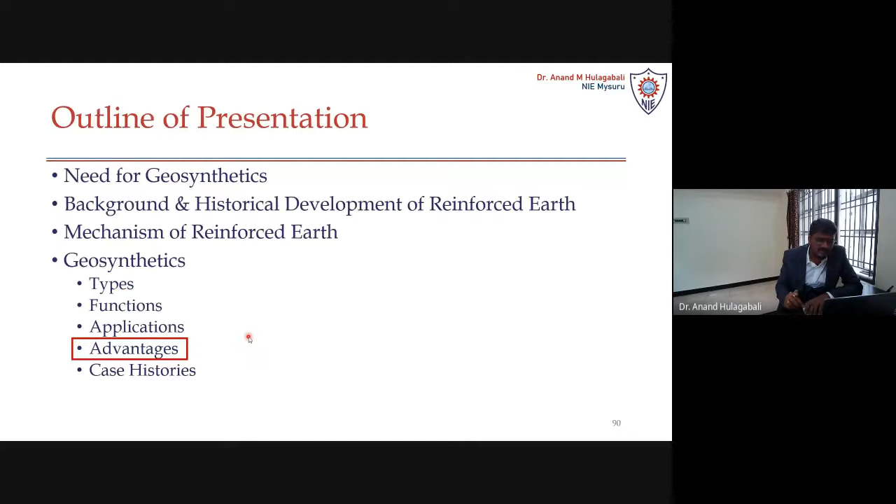Coming to the advantages of geosynthetics, they are less sensitive to the environment; they are basically polymeric products, but they don't actually harm the environment. And we have improved performance, they are more sustainable, and especially they are cheaper in product cost, transportation, and installation.

So they are much cheaper when you look at the prices of products: geotextile comes at around 12 to maybe 20 rupees per square meter, and geogrids are almost 50 to 200 rupees. Again, it depends on your specification. If you want better tensile strength, the price is going to increase. Geomembrane comes at a little higher price, like 300 to 600 rupees per square meter. Geocells are almost 100 to 400 rupees per square meter. So the cost is much lesser.

In fact, you need to compare with another solution. If you are making it very economical with respect to safety and sustainability, then this is a much more suitable product. Then we can save space. Installation is very easy. The construction quality is much better. Heavy equipment may not be necessary. And it is very consistent with a wide range of soils. We can use these products for any type of soil. Then we can save a lot of money in so many projects.

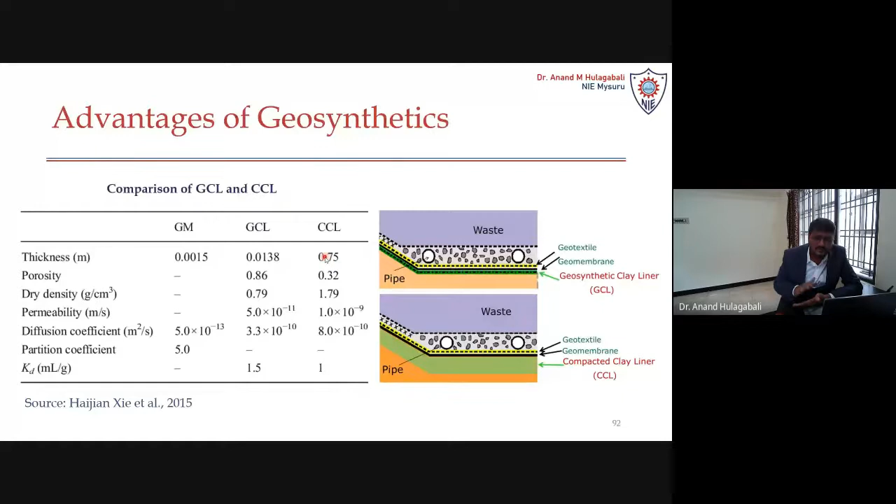Okay, for example, I can show you now. Let's say you compare the thickness of the compacted clay liner with respect to the geosynthetic clay liner. Compacted clay liner, you require something like 0.75 meters, but geosynthetic clay liner, you require 0.013 meters. So it's almost 13 mm thickness, which replaces the 0.75 meter thickness. So there is huge saving in the space. So that's one of the major reasons.

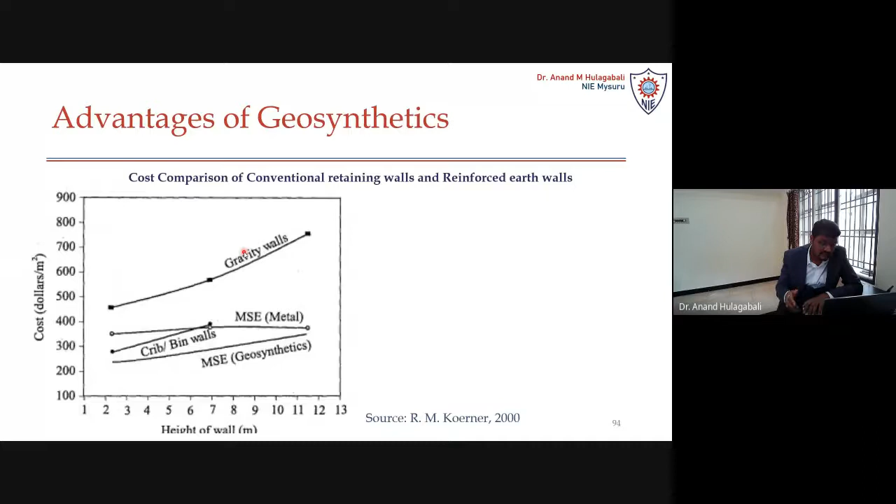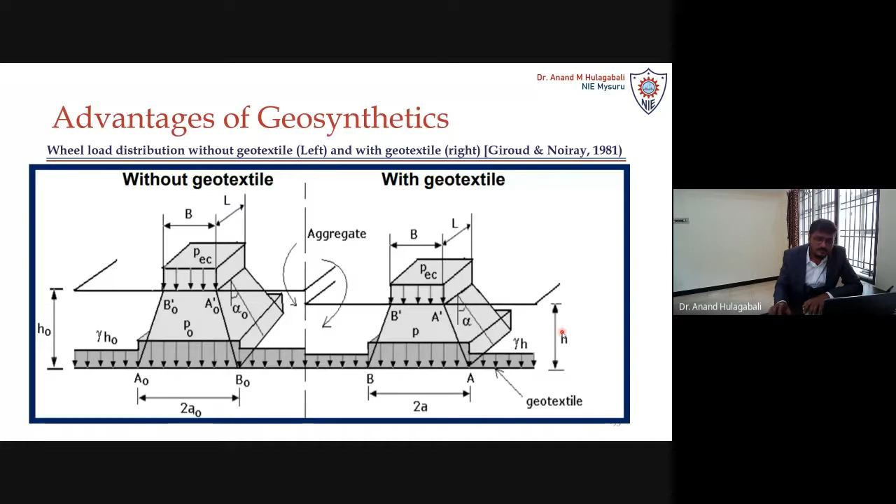Based on Giroud and Noiray, in their paper they have clearly mentioned how much thickness of the flexible pavement can be reduced when we insert the reinforcement. This is the h0 without reinforcement. This is the h with reinforcement. So that is the reduction in the thickness of the pavement when we insert the geosynthetic products. So that's one very important thing.

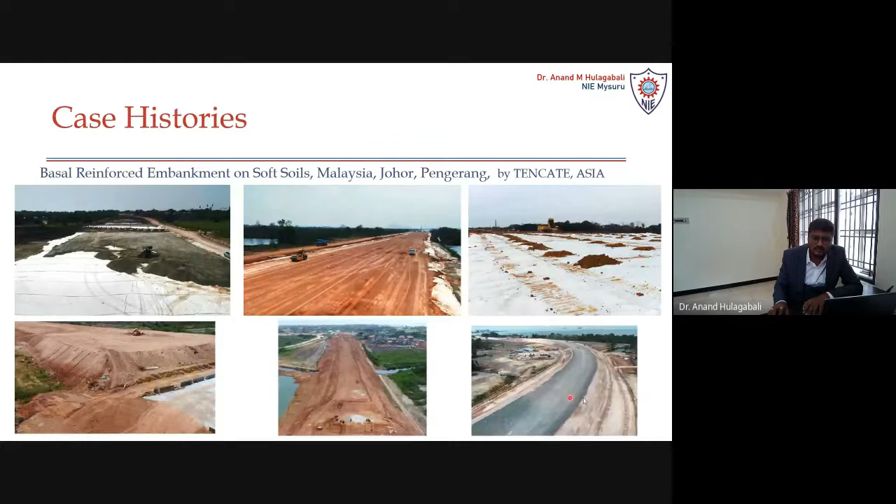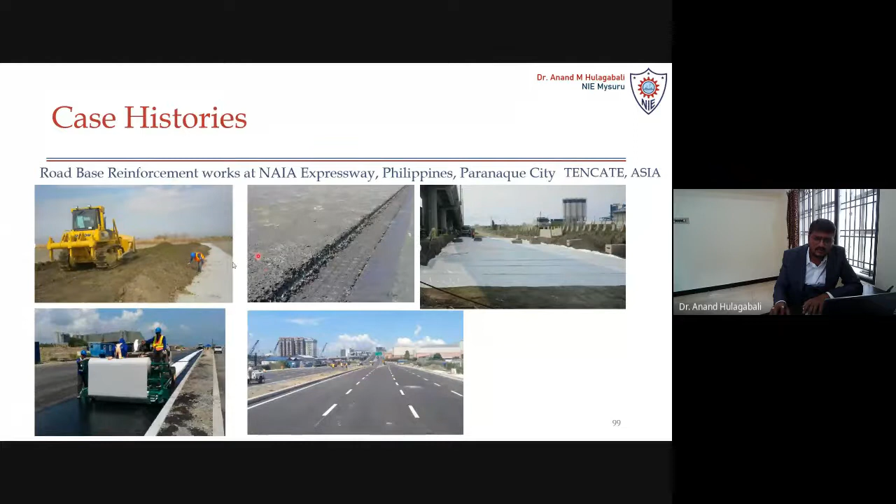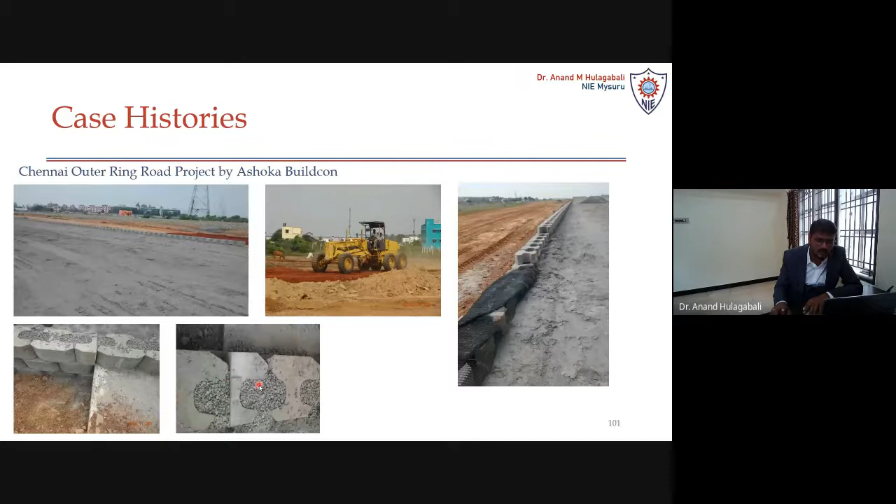In fact in 2014, along with Professor Rajagopal, we went to this particular project. It is an outer ring road project by Ashoka Buildcon in Chennai. They used fly ash as a backfill for the reinforced earth wall, and modular blocks were used for the facings. Reinforcements were geogrids here. These are the geogrid reinforcements used for the reinforced earth retaining wall, and these are the modular blocks produced at the site.

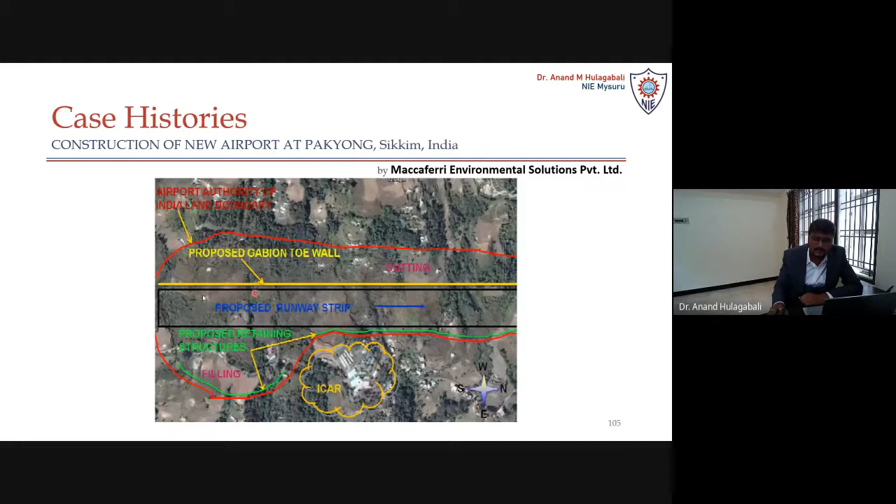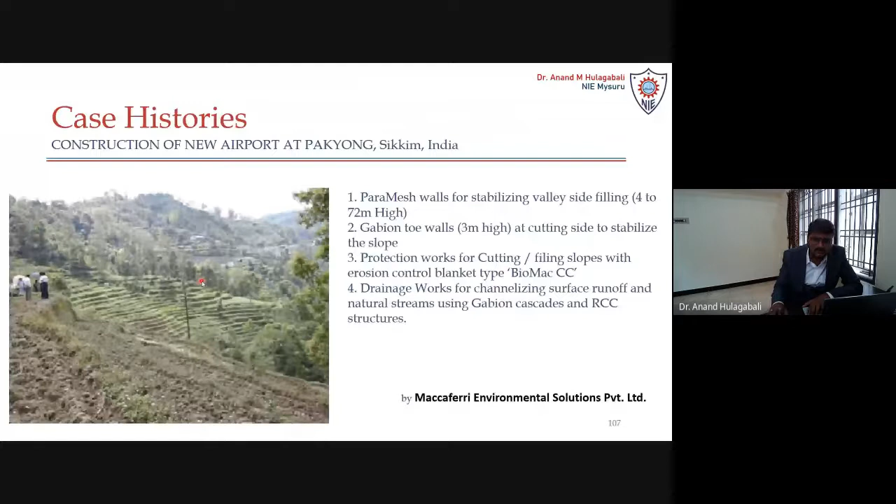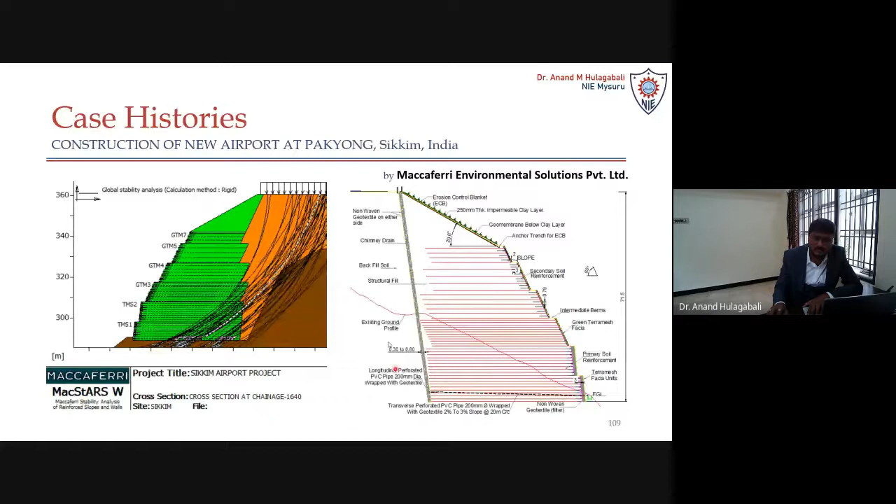These are a few difficulties they faced. This is a very lush green area, and they had different solutions, but they came up with a solution using the gabion wall. They constructed an almost 72-meter high gabion retaining wall, and did numerical analysis before actual implementation using their own software, MacStARS. These are some pictures of construction. They used a lot of geogrids, and this is the retaining wall. You can look at this.

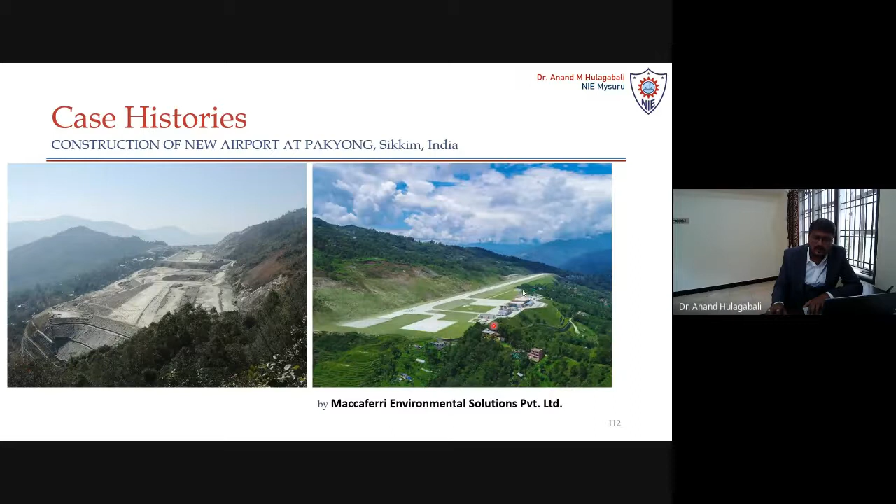So this is a retaining wall, a gabion wall, and this is a completed runway of Pakyong. This was basically by the Maccaferri. It's their very proud project, in fact.

Okay, so I'll just give you some information about geosynthetics at the end.

Initially the number of publications in the area of geosynthetics were very, very less. This is the global number. But now when you look at the increase in publications, the recent publications are much higher, up to 2015. So there has been a lot of increase in publications with respect to geosynthetics. That tells you how best these products have been deployed in various projects, and how best these products are giving us results, because there has been a lot of research carried out on this.

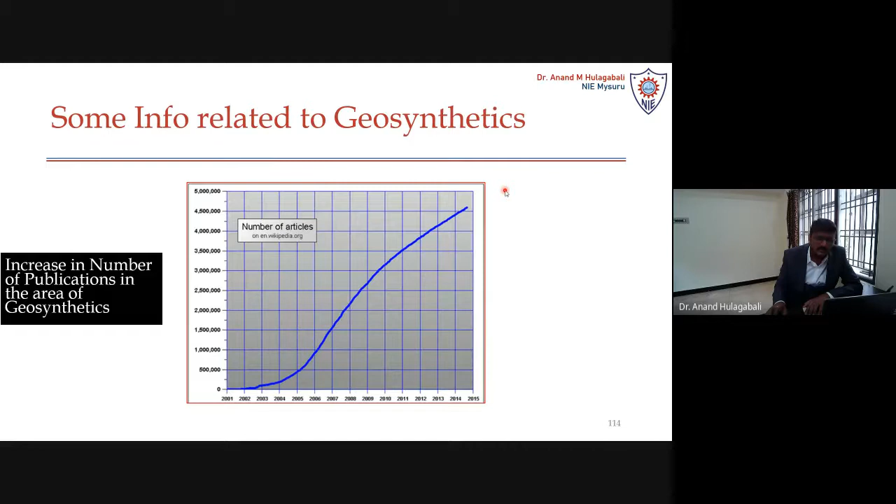In fact, in India also, we have a lot of research being carried out in many IITs, even in NITs, on this particular product.

Especially those who are students here, I have my own students from NIE and a few students from SVNIT Surat. For them, there is good news. There is a society called International Geosynthetic Society. The membership is free. You can visit that website and become a member.

You'll get a newsletter, and also updates of the projects being carried out across the globe in the area of geosynthetics. There are IGS chapter websites too, and the Geosynthetic Institute, if anybody is interested they can become a member. Geosynthetica is a very popular journal in the area of geosynthetics.

Okay, so that's all about geosynthetics. I hope all of you enjoyed my talk, and thank you everyone. If you have any questions, I can take a few. Thank you. And I thank Professor Solanki, Nehal Bhai, and Hitesh sir for giving me this opportunity.